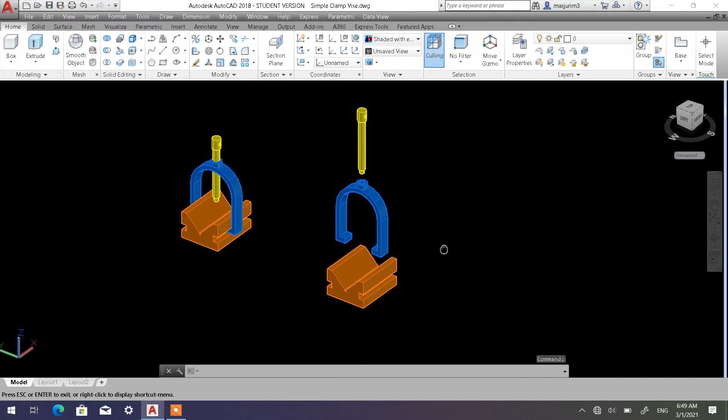Okey, so untuk single komponen part ni, mula-mula sekali apa yang perlu anda lakukan ialah kita kena pastikan sebelum tu you have to make sure that you punya view adalah southwest isometric view.

Okay, seperti ini. Dan juga kedudukan default southwest isometric view for your UCS should be as default like this one. X di sini, positive X, positive Y di sini dan positive Z seperti ini. It should be like this untuk kedudukan UCS for southwest isometric view, and make sure that it is parallel view.

Now, sekiranya kita nak pandangan di sini, pandangan ini adalah merupakan pandangan front view. So it means that kita kena rotatekan dia, okay? Kerana kalau kita perhatikan dalam world coordinate system, WCS this one, front dia adalah berada di sini. So it means that kalau saya nak ambil bahagian ni, this section sebagai front view, so I need to rotate all of this.

Okay, so what I need to do is go to here, rotate. Okay, ini dah betul, kenapa? Kerana positive Z di sini dan dia akan rotate di sini. So you make sure you ortho on. So kita pick rotate and then select all.

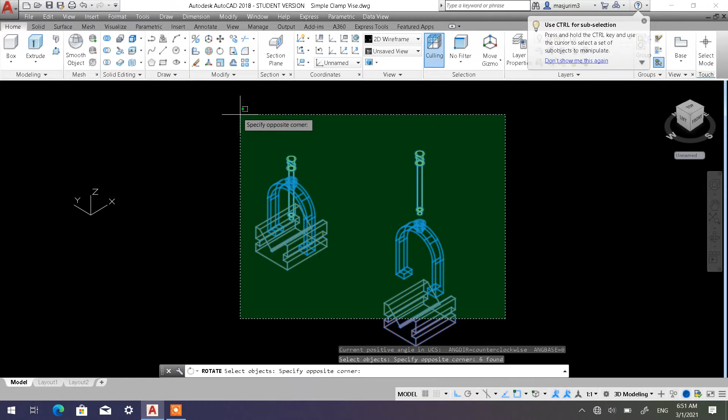Okay, select all the related parts or components, and then press enter. Then probably you just pick any point. Let's say I'm going to pick this end point. Alright, and then you just need to rotate it, become like that.

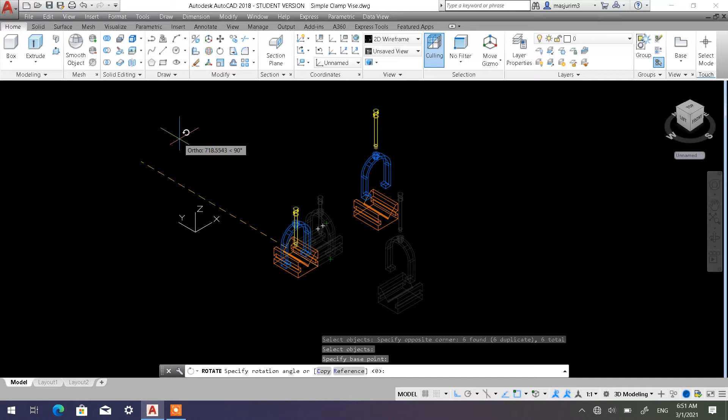Okay, you just need to bring your cursor, you can play around, just bring your cursor like that. So I'm going to make sure that my component should be like this, okay, should be like this.

Why? Because that's why I mentioned to you just now that I would like to have this section, this surface, bertindak sebagai my front view, right? So once after you finish all this, kita save, make sure kita save this one, right?

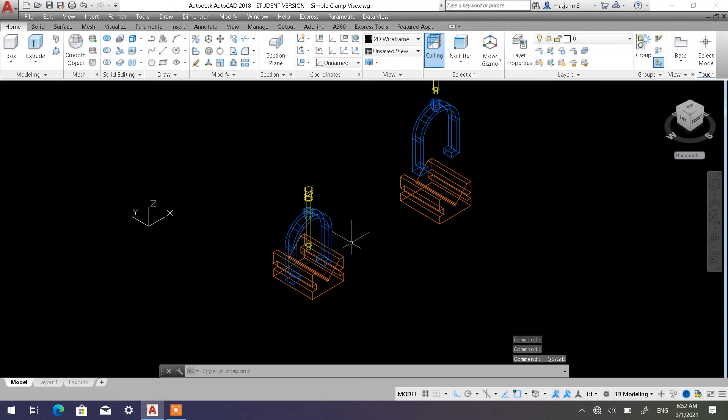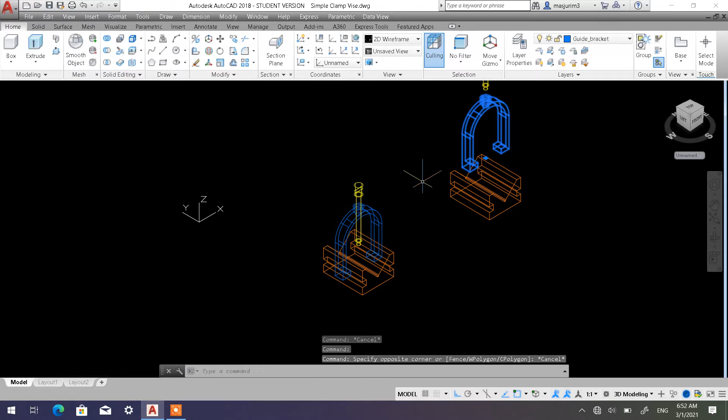Now, what you need to do is sekarang ni you kena buka you punya template yang telah you hasilkan pada sebelum ini, okay, because kita nak transfer each of this part. Each of this part, ini sama je, you can take either this one or this one, this one or this one, okay, ataupun you can take also either this one or this one.

Dia sama kan, cuma setiap part ni berada dalam assembly view, whereas this all this part berada dalam kedudukan exploded view. So kita kena pilih which type of title block yang kita nak gunakan, sama ada landscape ataupun portrait.

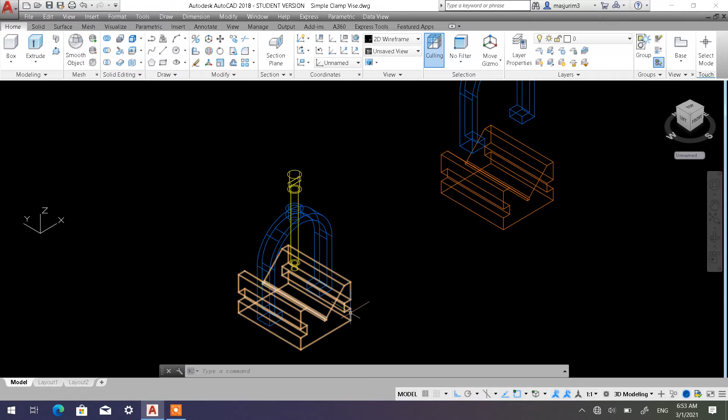So katakan I nak convert this base, main base terlebih dahulu. Okay, main base, saya nak convertkan 3D main base ni kepada 2D technical drawing. So let us open our template.

Okay, ini tak ada template, so kita kena go to template, drawing template. Okay, this one over here, file type, tadi dia dalam bentuk drawings, so you need to switch to file type template.dwt, drawing template. Dan kalau you perhatikan di sini, saya dah buat juga, saya dah hasilkan portrait.

Before this I already showed you how to create an A4 landscape title block. You can also create another type of template which is an A4 portrait. The step is almost the same, it's just that instead of using A4 landscape size, you have to switch it to A4 portrait size.

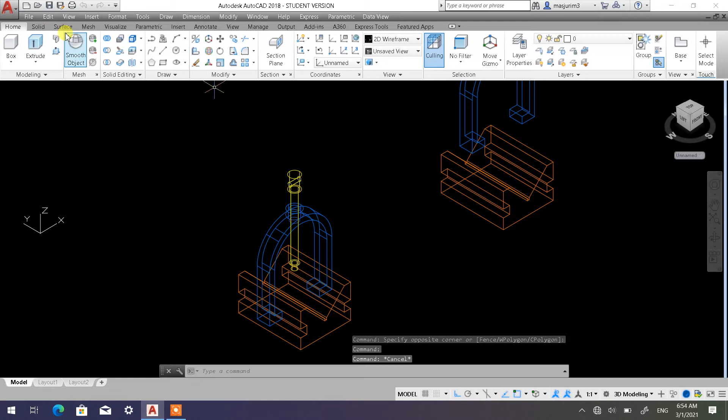Okay, let's say for this one I want to use A4 landscape. So I need to open first the A4 landscape, go to template, then go to A4 landscape. This is my title block which I've created previously. Double click it, there you are.

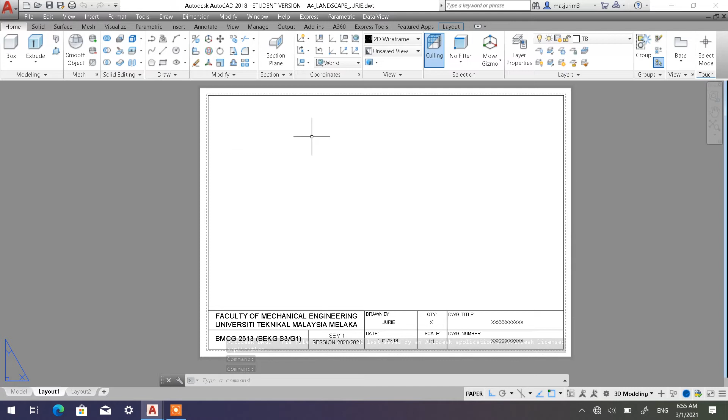If you still remember, this title block is still under template extension file, so you need to convert it into drawing extension file first. So you need to go to file.

Remember, once you've opened the template, you go straight to save as. Let's say I'm going to save it under desktop for a while, under a new folder. I've already created a new folder, and then you rename it as main base, since I want to build the main base.

Instead of AutoCAD drawing template, you need to convert it to .dwg. I'm using 2018, so you save it under .dwg, which stands for drawing extension file. Don't let it save as a template, because this is the original A4 landscape we called out just now, so change it to .dwg and rename it.

Just save it, don't save it under the template folder. As I mentioned, I've already created a folder under desktop which I renamed, and I'm going to name this file as main base.

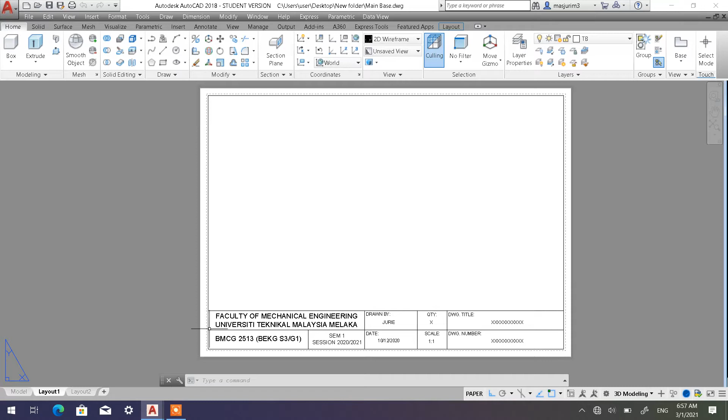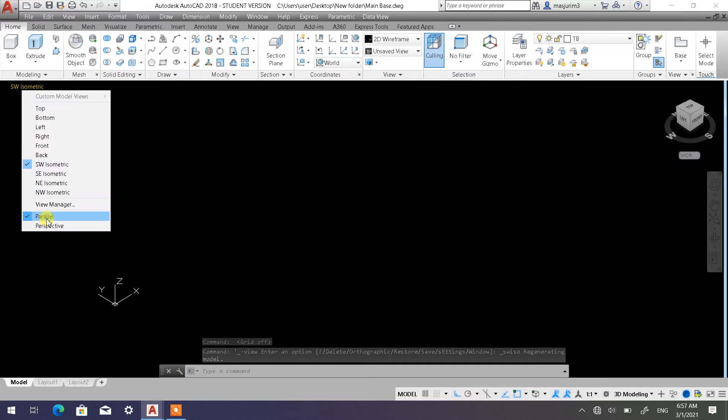Now what you need to do next is go to the model. This is layout, you switch to model. I'm going to turn off my grid lines, then make sure you change to Southwest Isometric View, and make sure you are in parallel conditions.

Once you've created this on the main base, go back to the drawing you created for the simple clamp vise. Since I want to convert the main base, you can pick either this one or that one, it doesn't matter since they're the same. Let's say I'm going to pick this one. Click it first to select it.

Then go to edit and then copy. Don't go to copy base point, just go to copy directly. Again, you can pick either this main base or that main base, just pick only one. Since we want to convert a single 3D solid model to a technical drawing, we take it part by part.

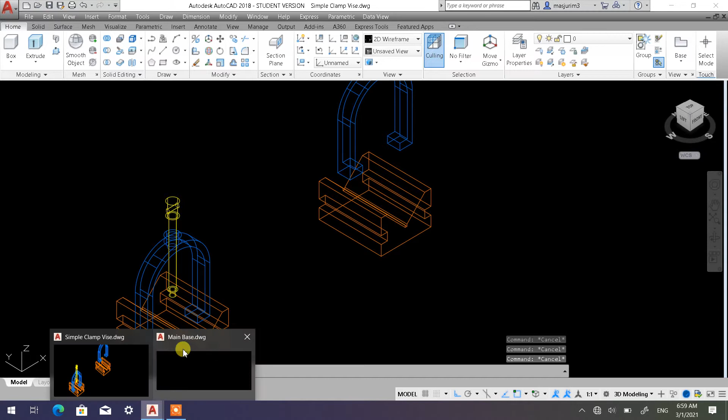So let's build the main base first. Click it, then go to edit, copy. Then escape once you've copied it, go back to the file where you built the main base, where the layout looked like that earlier. Go to model, then go to edit and paste, then just simply click anywhere. If you zoom in, it will look like that.

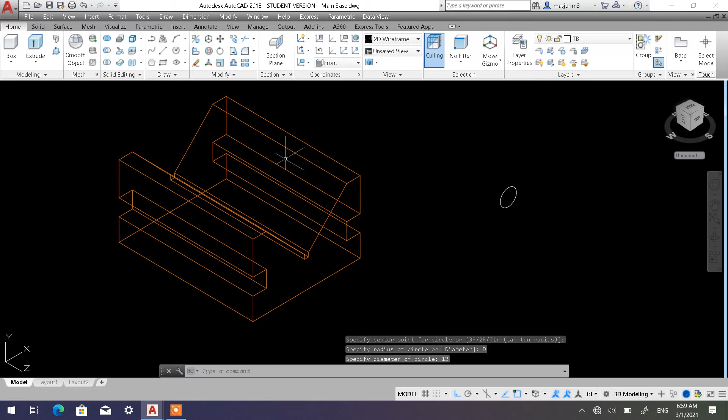So I'm going to change the position of my XY plane to front. Then I'm going to simply create the hole, let's say the diameter of the hole I'm going to make is 12 mm, enter, and then I'm going to extrude it like that.

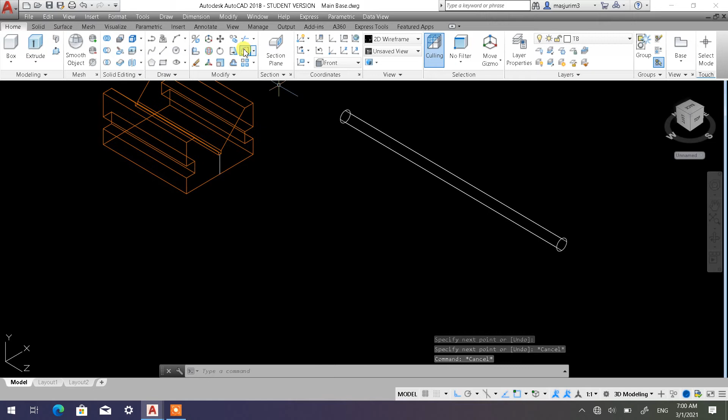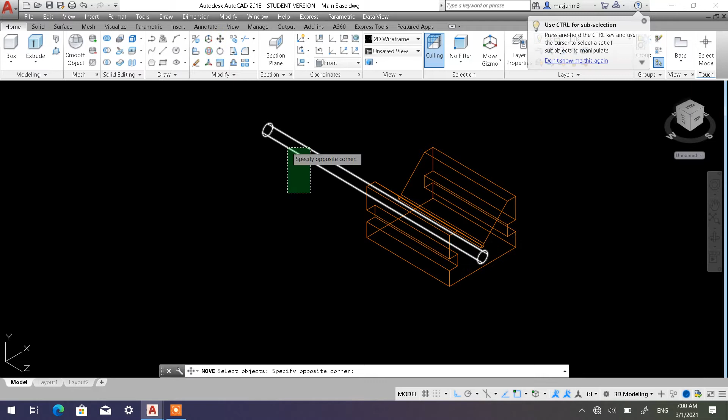Then I'm going to transfer it to the center here. I'll simply create a guideline like this, then move it from this center point to this midpoint. Then I can eliminate this guideline, and move this one a little bit outwards like that. Make sure ortho is on, or else it won't go where you want it to.

And once I rotate it, okay, it should be like that. Now it's time for me to subtract.

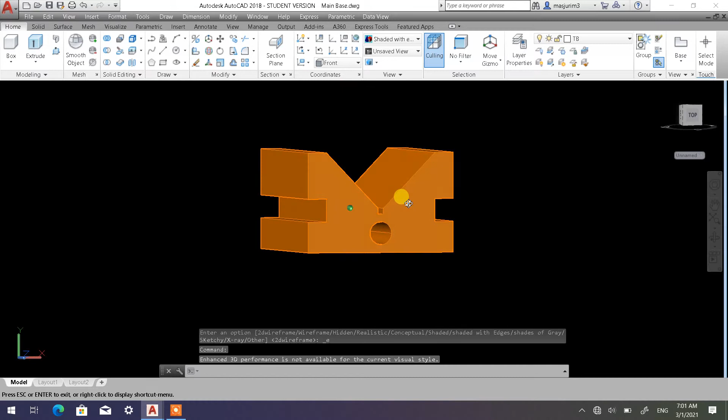Okay, there you are. If I say shaded with edges, it should be like that. Okay, and now I'm going to...

Add a feature known as fillet, whereby I'm going to fillet all of these 4 edges, with a radius of let's say 5 mm. Let's see how it looks - okay, this should be okay. So I'm going to create all these 4 side edges at the bottom here with a 5 mm fillet radius.

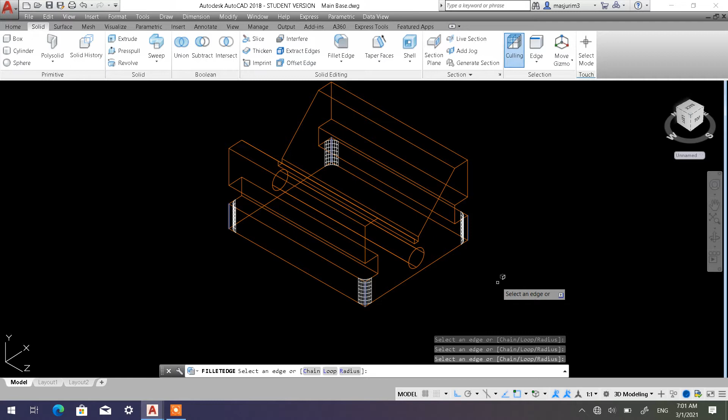So once confirmed, I just need to press enter, then enter one more time. There you are. So remember, you have to switch this back to the original position for your UCS. Now I'm going to save this.

Okay, so this is under model, and now we're going to switch back to layout 1. Layout 1 here. And if you notice under the home menu tab, at the very end there is a view.

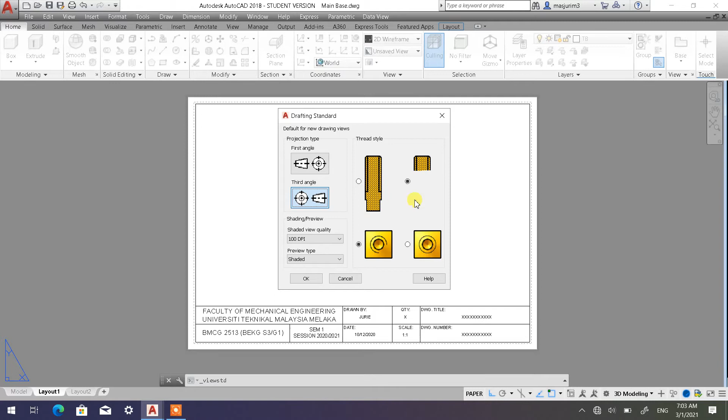Maintain it like this. Your thread style for the pandangan sisi, which is the side view, while for the top view or plan view, your thread style will become like that. The thread style or hole style will become like that.

Once after this, just leave it by default, because this is only the shaded option. So just leave it default at 100 dpi and also shaded. Once you've already selected all this, then just click OK.

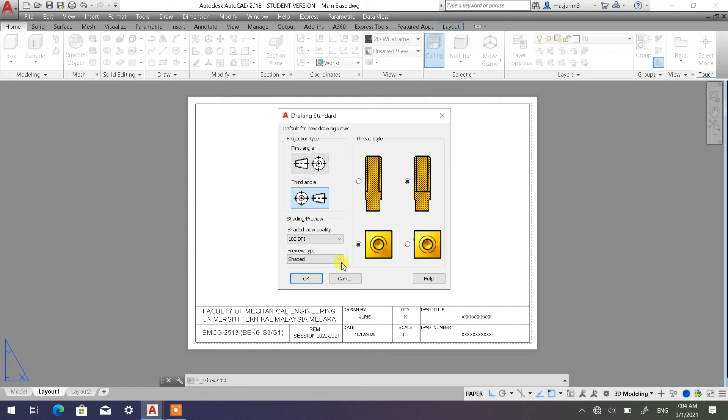Alright, now it's time to convert or call out the 3D to insert into our A4 landscape title block. What you need to do is expand this arrow, click here, and click from model space. Don't go to from inventor, because we're not working in Inventor, we're working in AutoCAD.

If we were working in Inventor, we would pick this one instead. Inventor is another type of advanced design software. Normally it's more geared towards 3D.

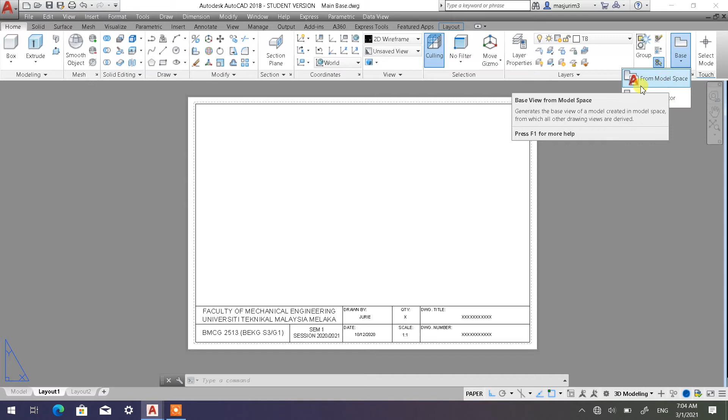Alright, so go here, from model space, for AutoCAD. Click this one. Okay, wait a moment - there you are.

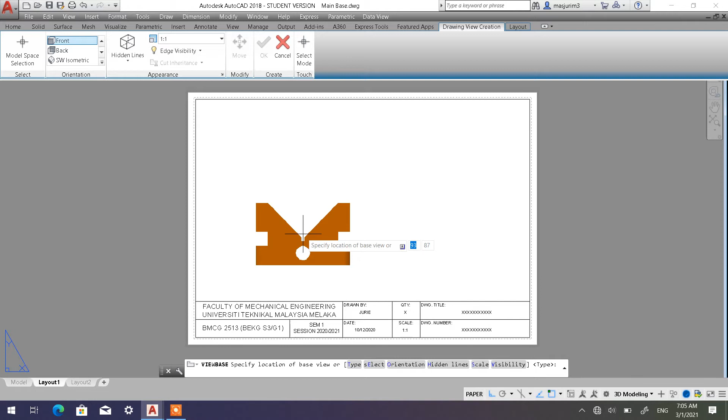You don't need to worry about the scale, because later on we can rescale it according to the size of our A4 landscape. So let's say I'm going to put it here. Its position you also don't need to worry about, because later we can arrange it.

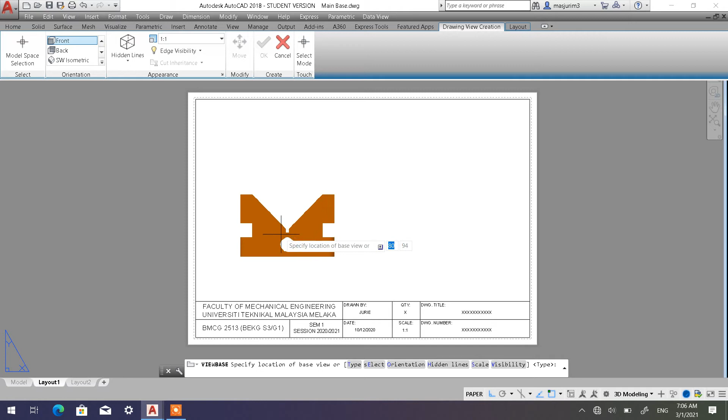Let's say I'm just going to simply place the front view here. Just click front view over here. Once confirmed, you just select it - oh sorry, you need to exit it.

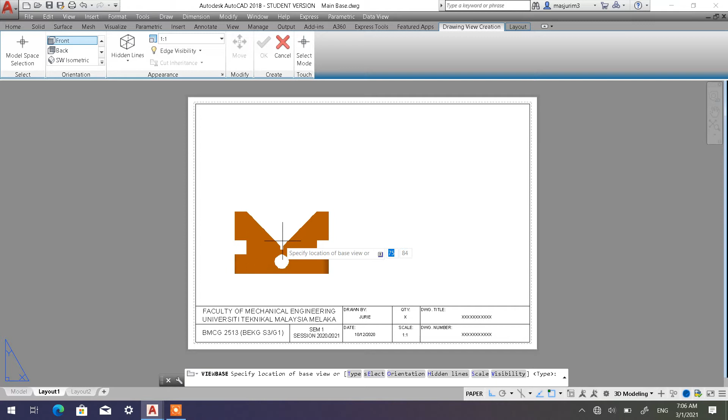Sorry, not select, a different method, another way. There are a few ways actually, but I would like to show you the most simple way. Let's say you just click this over here, then click exit.

Once you click exit, it will bring out another type of image. Let's say, if you drag it over here, in this particular case you don't need to worry whether you need to turn on or off your orthogonal, your ortho.

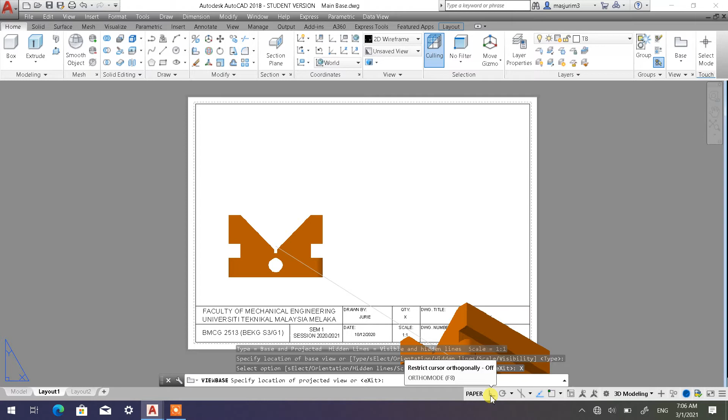Normally I just turn it off, because it will automatically show a visible line. You just drag here, it will automatically align with this one over here. So let's say this is our right side view.

Just click, because later on we can reposition it, don't worry. Click this one and then bring it over here. Even if it goes out, it's okay, because later we can rescale.

Click here for our top view or plan view, and then bring it to this side, the right side, for our isometric view. Click. Once confirmed, you just need to go here and exit. There you are. Now it's too big, if we go into scale it's not suitable.

So what you need to do is bring your cursor to the front view, because all of these views - top view, side view, right side view, and also isometric view - will follow the front view's parameters. Let's say you click here.

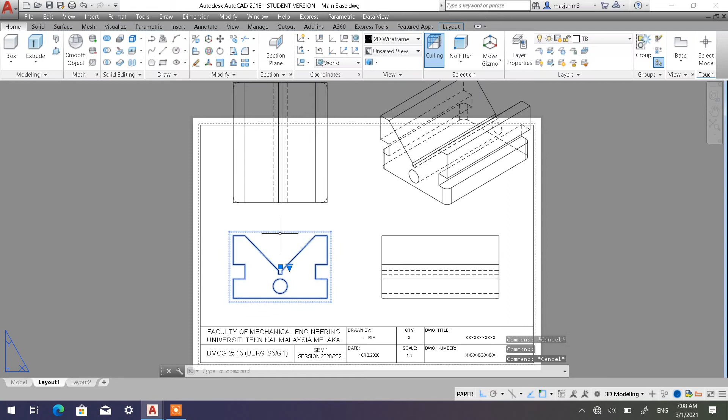Double click. So if you double click, as you can see over here, we have the scale here. So instead of 1 to 1, try 1 to 2. There you are, so I think 1 to 2 should be fine.

We do have a few types of scale over here, so you can play around with this one - 1 to 2. Once confirmed, you just need to click OK, and then you can move it.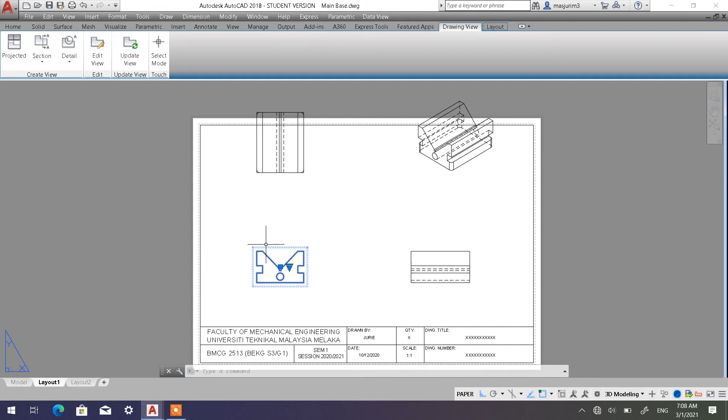You click this one, see the color appear, once you click, just click once, don't click twice. If you click once then twice, you go back to here.

You can play around with, let's say if you want it colored shaded, but normally we will shade with hidden lines. We want to show the hidden lines here, and then click OK.

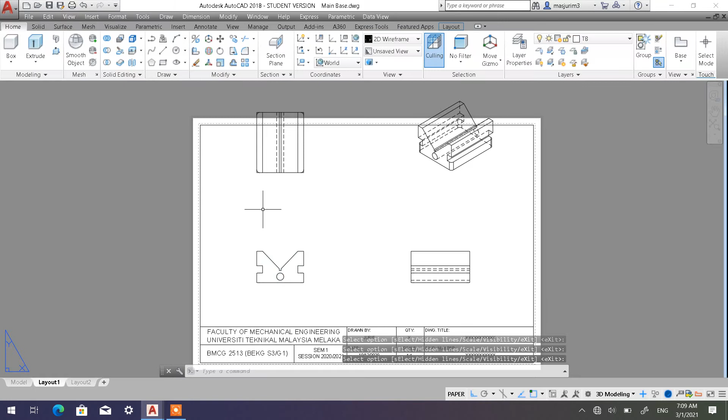Say I would like to position it over here, and this one too I want to position. If you don't want it fixed, turn off the ortho, so you can move freely. Like that, so this one should be aligned with here, this one should be aligned with here.

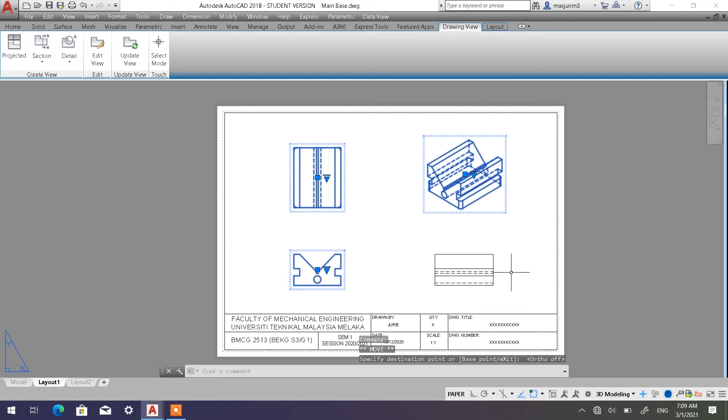Let's say I'm going to put it somewhere around here. Now make sure there is space here, same with this one, more or less.

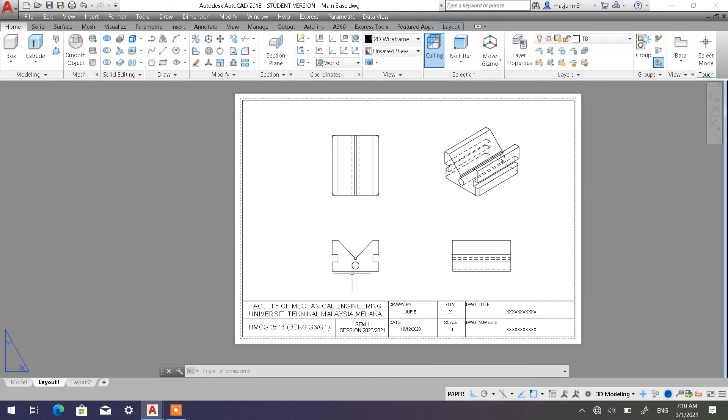Now if you look here, if I double click, it should be hidden lines. So click OK.

Now for the circle, we need to have what's called a center mark. So what you need to do is go to Annotate. Here there is a center mark option.

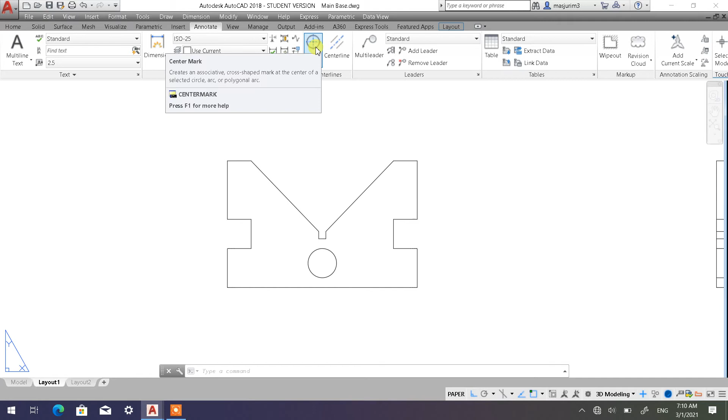So click this center mark and then bring it to the circle's line. Just click, and it will automatically do it for you. Once confirmed, you just need to press enter, and it will exit from any command.

Here too, normally the top area needs to have its center line as well, center mark also. So again, center mark for this one - for the circle you pick this one, but for center mark for this one you have to pick this one, center line.

So the first line is for this part, this side, this part the other side too, and the dotted line. So just click this one and this one. There you are, as you can see, this appeared.

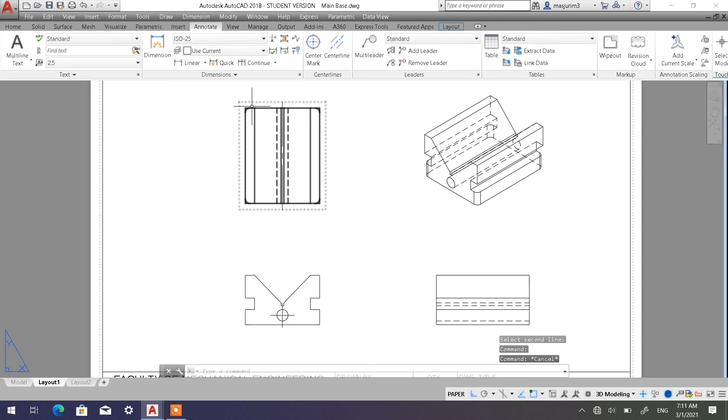Say at the bottom part here and also the top here, both this one and this one. So again, center line, you're going to pick this one and also this one.

There you are. Now it's time for us to insert dimension. Dimension is under Annotate, the annotate menu bar or annotate menu tab I showed earlier.

I clicked earlier to call out center mark, center line, but dimension is under Dimensions. Noted, under Dimensions. If we expand this, we have a few types of dimension style. Let's say I'm going to pick linear.

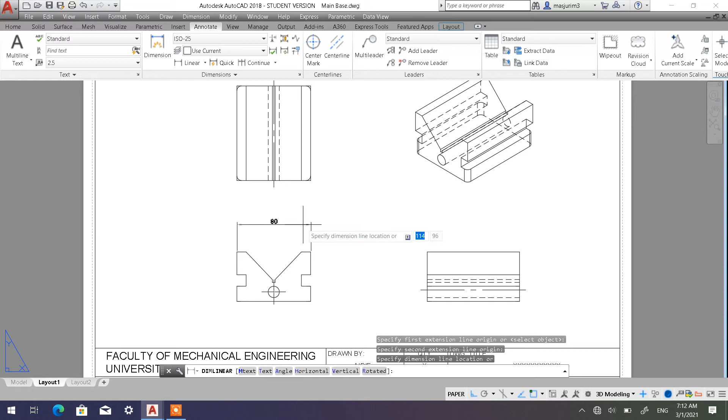I'm going to pick it here, start to here, 80 mm. Click like that. See?

If it's too big, if the height is too big, you need to click this one over here. See this? On the dimension, click this one. This is the same also - remember, if you pick ISO 25, make sure you use ISO 25 here, not annotative, not standard.

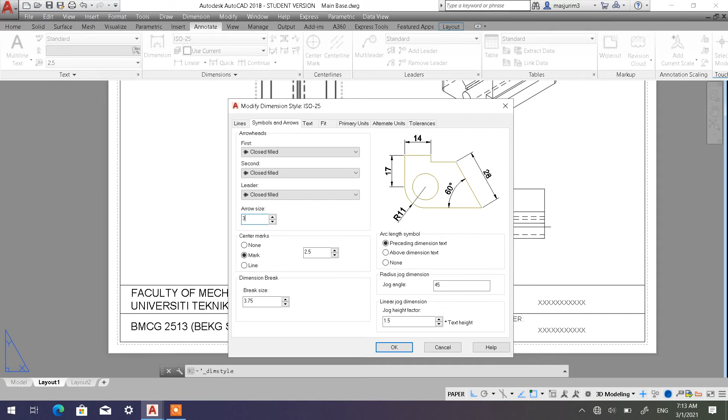Go to modify, and then you need to go to primary unit. For the precision, let's say I don't want to have my decimal point. Hopefully you will still remember this. Go to text, and you can play around with this text height. Let's make it bigger, make it 3 mm. Symbols and arrows also, I'm going to make it 3 mm.

Once confirmed, just click OK and then close. There you are, they're a little bit bigger. So I'm going to proceed with my dimension.

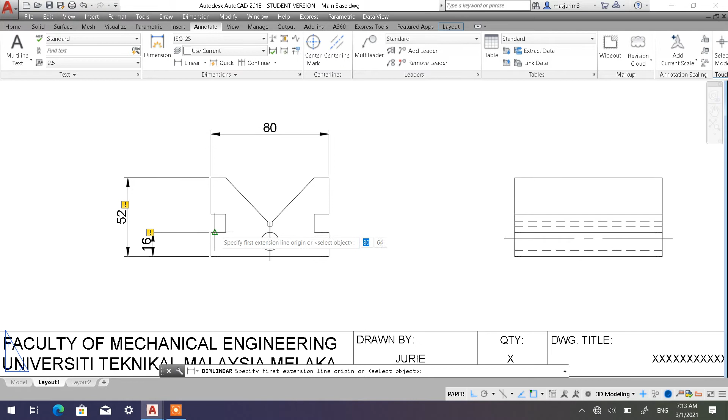Go again to linear, and this time I'm going to pick here - this endpoint to this endpoint. Let's see here, and leave this, no problem. Later I will show you how we are going to eliminate this exclamation mark. So another one is this to this, 16. And another one is this and this, should be somewhere around here.

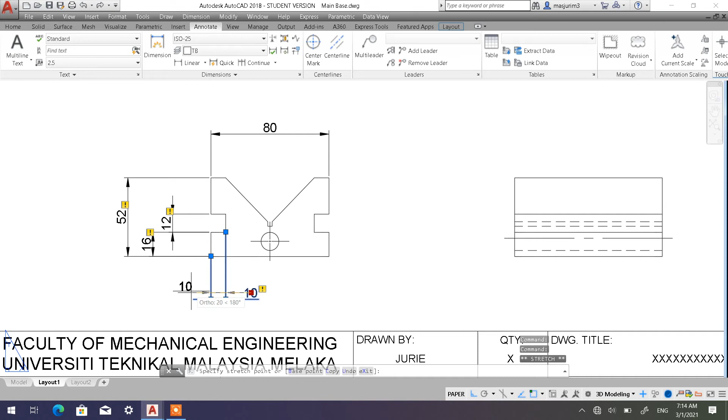I'm going to create also the distance between here to here, which is 10 mm. So I want to move this 10 here - just click once and then you see this, click and bring it to here. If you want to move the extension line, just pick this one or this one, and then locate the position you want.

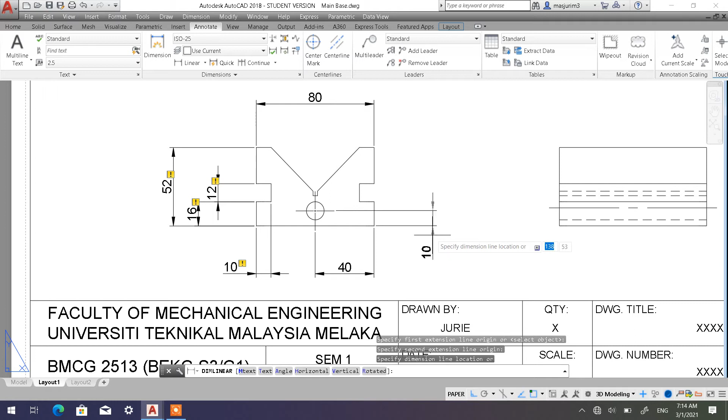I'm going to create also the distance from here to here, and I'm going to click this one to here. And also here, don't forget, 20 mm - 20 mm from here to here. You remember, 20 mm.

Just click and I'm going to transfer it, because it interacts with this 10 mm line, so we don't want it to interact like that - just bring it outside here and then bring it somewhere around here, and extend it to make it roughly the same line.

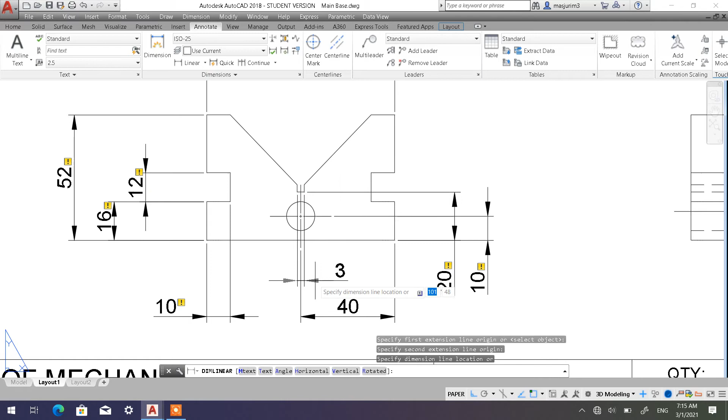And then also we do have 3 mm here, 3 mm from here to here. Okay, just fine. Alright, and don't forget here we need to make the length.

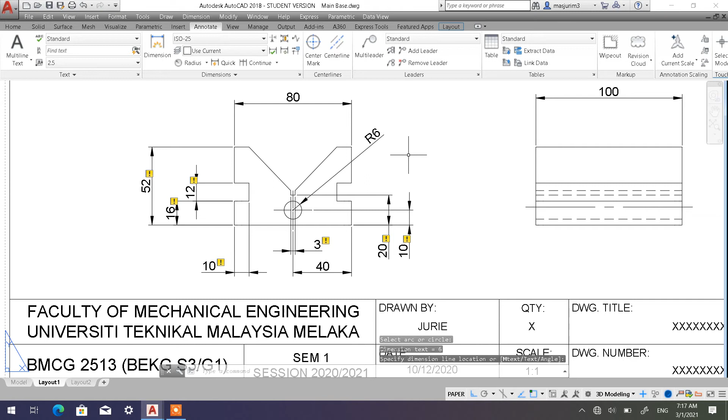And don't put it too near to the line object. Don't place the dimension too close to the object's line like this - that's the wrong technique. So somewhere around here like that. If it's like this, should be okay - don't place it too close. If you want to shift it a bit, move it down slightly, that's fine too, no problem.

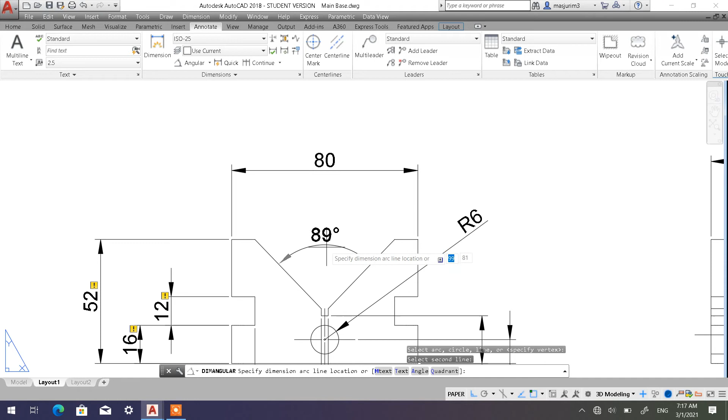Now, here too, angle 90 degrees. So if it's an angle, you pick angular - there's angular, you click angular, this one and this one. It should be 90 degrees but it's okay - we made a mistake before in the 3D, but it's okay, I just wanted to show you how to do this.

And then for this, if you look at aligning, I will focus only on these: linear, align, angular, radius and diameter.

Yang lain, itu bukan common type of dimension yang biasa kita guna. Yang biasa kita guna adalah linear, align, angular, radius and diameter.

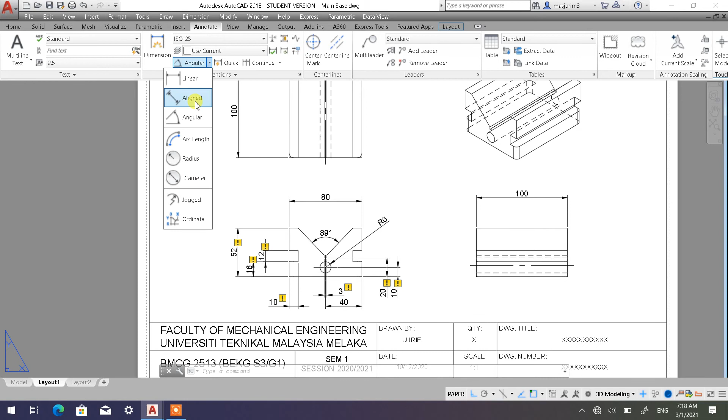Untuk align, dia kalau melibatkan garisan yang condong, tapi kalau dalam kes ni kita tak perlu buat, tapi saya just nak tunjuk pada you all. Click this one and this one, baru dia akan align dengan garisan 20 mm.

Okay, katakan I'm going to make it somewhere around here. Okay, ini bertindan kan, so 80 ni I nak anjak dia ke atas lagi supaya dia tidak bertindan. Okay, like that. But it's not necessary to create 20 ni. Line 20 ni kenapa? Kerana kita dah ada 89 darjah kan. Tapi kalau you nak tunjuk pun tak ada masalah.

Okay, ini kalau yang senget-senget ni ada slanting macam ni. Kalau you nak, ini adalah merupakan panjang from this one to here. Panjang dia, you kena pakai align. You tak boleh pakai linear. Kalau you pakai linear, you pilih tengok you pilih ni, maka dia akan hanya melibatkan horizontal dan vertical saja. Okay, X dan Y saja.

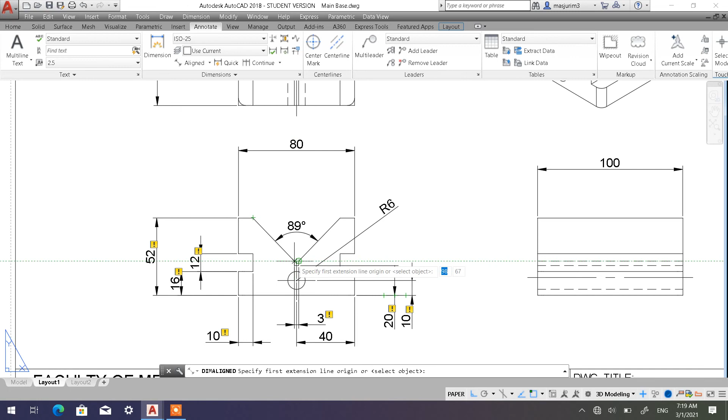So kalau you nak create this one, I delete balik sebalik ni, and I will show to you. You have to use align. You can pick here to here or here to here. Katakan this time I tunjuk kat sini lah. Okay, ini to here. Let's have to make it somewhere around here. Di 41 pula.

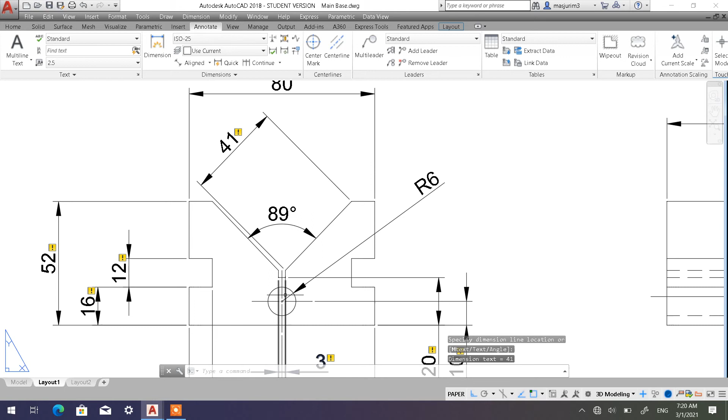That's why I cakap kalau dia ada 89 ni tak payah create this one lah. Ni tengok, 41 bukan 20. Sorry, tadi I tersilap. Maknanya kalau kiri kanan dah betul ni should be 41 lah, bukan 20 tadi. Okay, 41, it should be 41. Okay, like that, mana-mana pun boleh.

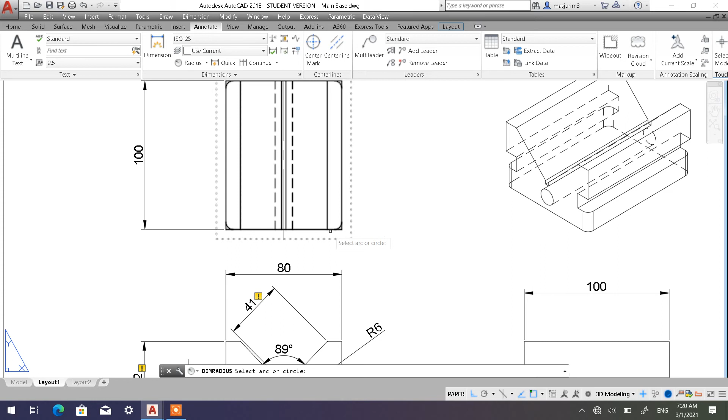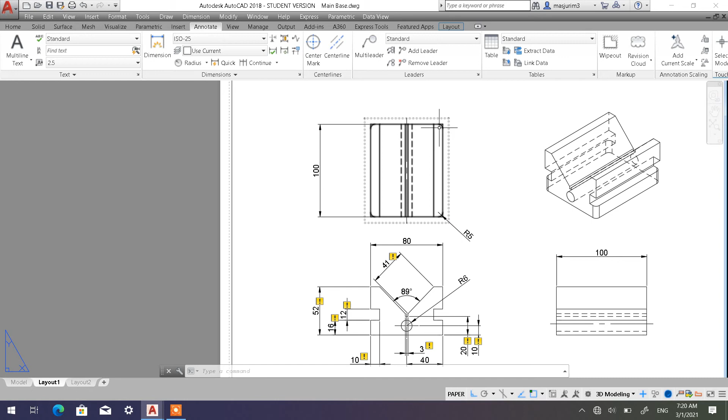Okay, so remember kita ada buat radius juga di sini kan? So kalau radius, definitely kita akan melibatkan this one lah, fillet kan, radius. Just click this one and drag it over here. Okay, buat satu je cukup, pasal we will understand that ke setiap bucu ni dia akan representing this one, R5 1 2 3, buat any bucu ni yang radius 1 enough. Alright, and then

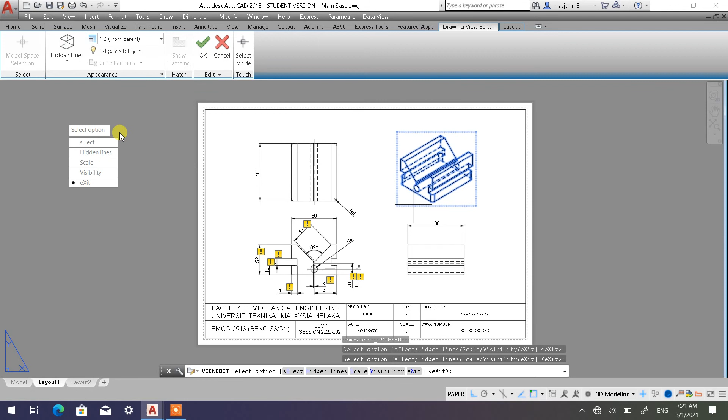once after confirm all this, yang ini untuk isometric view ni, you can double click this and then you can just switch this to visible lines like that. Okay, it doesn't matter kalau you nak buat visible and hidden lines, but normally untuk 2D technical drawing like this, pada bahagian isometric view ni, normally kita akan gunakan visible lines like that. Okay, so once I confirm, just click OK. So I nak reposition ni sikit ke atas pasal ini dah sedikit kan. So I'm going to reposition it ke atas like that.

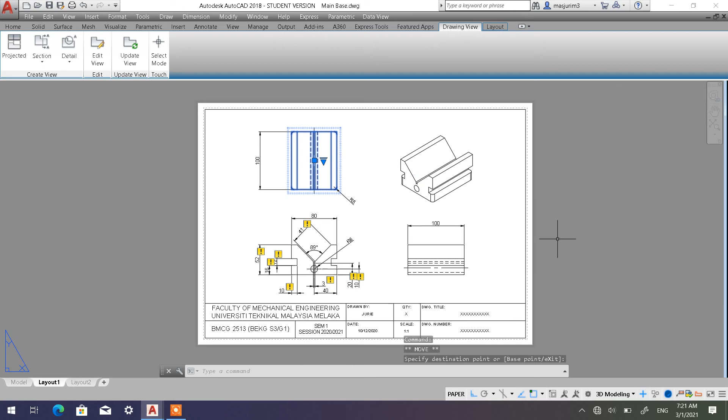Okay guys, so once after you dah confirm ni semua, you can just simply ubah lah you punya drawing title, double click.

And then I'm going to delete this, all this, and then I'm going to do this main base, main base tak silap kita punya ni kan. So I nak buat this center dan close. Katakan I nak buat besar sikit dia punya ni, ada lain tak? Kalau tak ada, just I'm going to make it 4 mm. Enter, okay, besar, and then let's I'm going to make it bold, close.

Okay, I'm going to reposition this, right, move. Okay, scale dia tadi 1:2 kan, so I'm going to change this, double click, 1:2, okay, close.

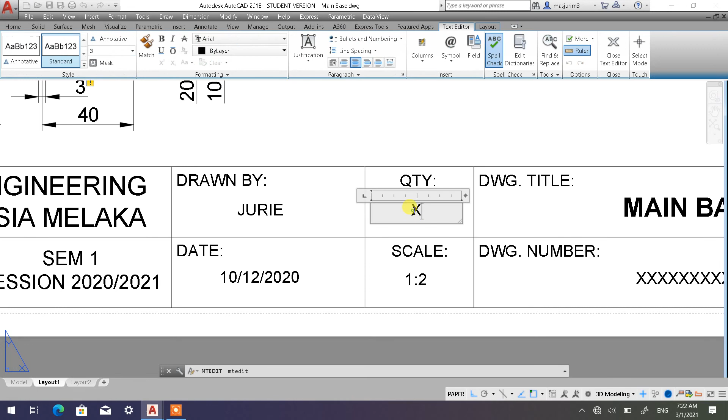Quantity dalam satu produk tu, main base ni ada satu saja quantity dia, and date ni you can change according to the date, as well as drawing number kalau you nak buat 001 ataupun you nak buat, katakan nama dia clamp vise kan, simple clamp vise, so you can make it short form simple clamp vise, SCV /001. So 001 ni katakan main base ataupun okay, whatever lah.

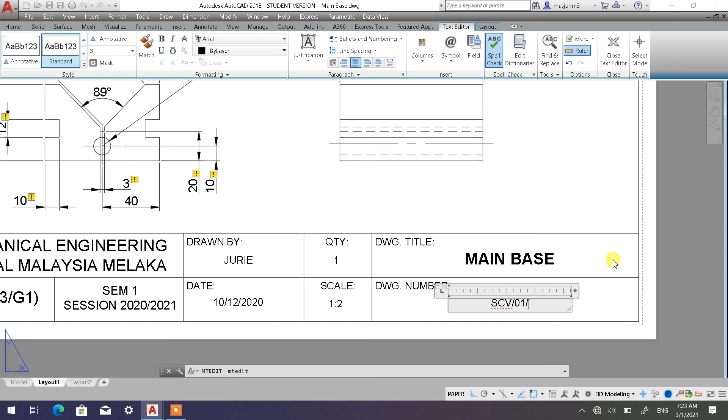Okay, dan katakan you tak nak buat 001, you nak buat 01 pun should be okay. Okay, and normally kalau you nak buat pun /V1. V1 tu version 1, maksud kalau selepas ni kalau you ada modification whatever, that one is version 2. Okay, version 3, version 4 and so forth. Okay, so, and then once after comment just close text editor.

There you are. Alright. Saya mesti recording ke? Okay, still recording.

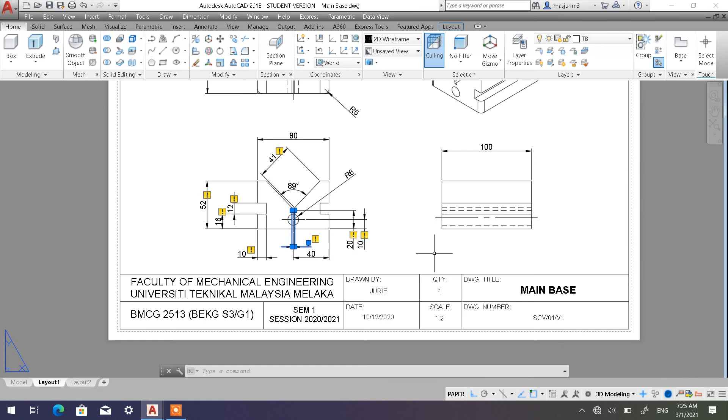Okay guys, so we have to remember that this one sebenarnya hole through kan. So how are we going to make sure that people know that sekarang ni orang dah tahu hole ni radius 6, tapi kita tak tahu sama ada ini hole through ke ataupun hole with a certain depth.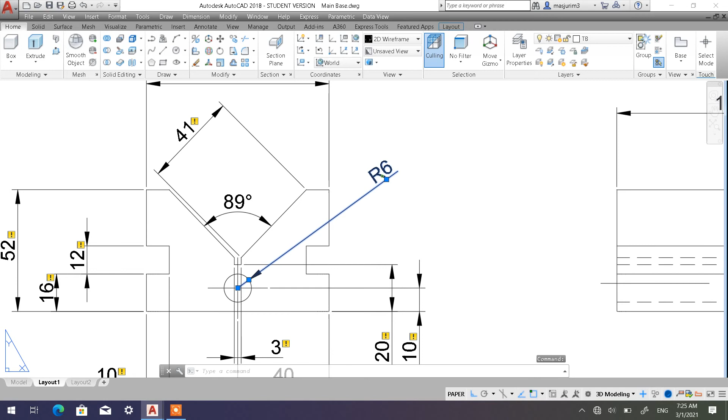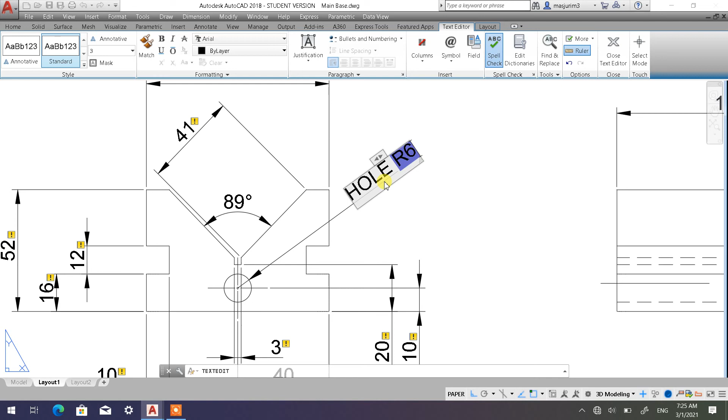So kalau katakan HOLE THRU kan, so you just need to double click this one, and then you bring your cursor, you bring you arrow tu kan, arrow tu you pergi ke paling ujung, nampak paling ujung tu kan. Okay, so you just, caps lock, HOLE R6, lepas tu arrow pada you punya keyboard tu bring dia dekat sampai ujung tu, space bar, THRU, true.

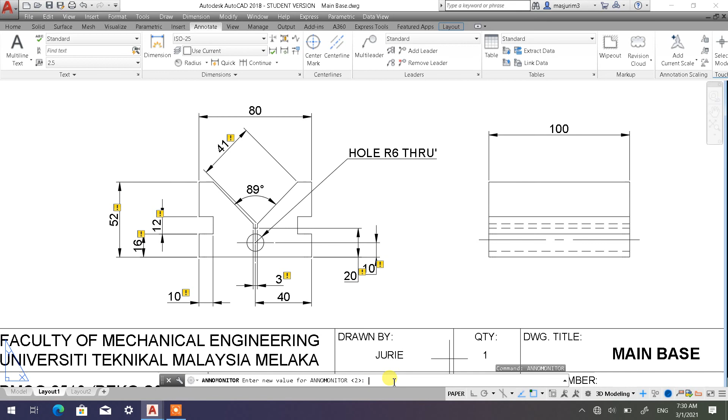So that's one part done, the main base. This is about how we convert from 3D solid modeling for the main base into 2D technical drawing. Remember, 2D technical drawing will have orthographic views - top view (sometimes called plan view), front view, and right side view. You can also insert or add an isometric view like this.